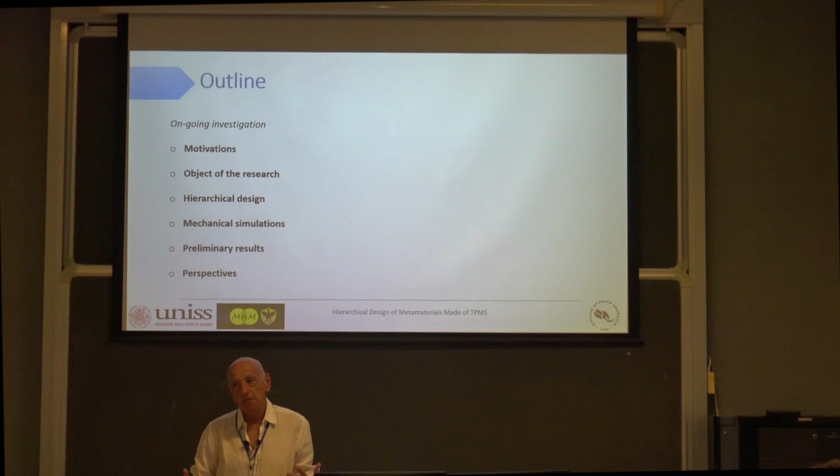Okay, so let's go to some more technical stuff. First of all, I have to say this is ongoing investigation, so I'm just presenting some ideas, some developments, and problems, mostly problems. So this is the outline.

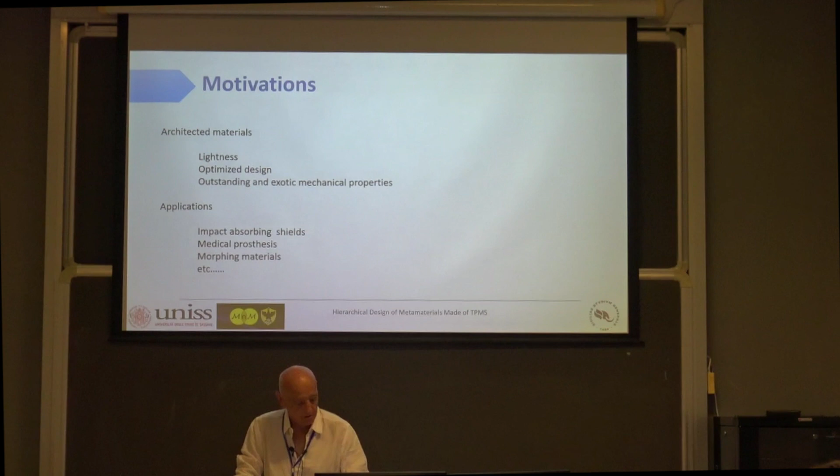We want to work with architected materials. We know why—there are many applications, as we've already seen. A huge amount of metamaterials have been proposed: foams, lattice materials. We know they have very nice properties, for instance for impacts. They have very large ductility, and so on.

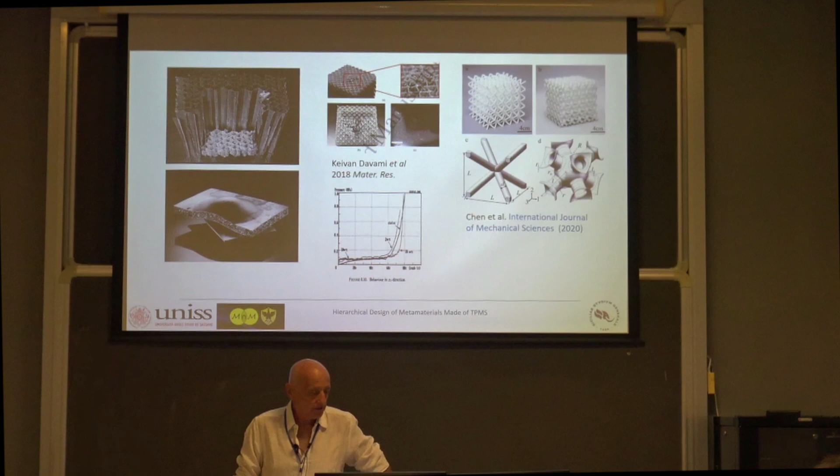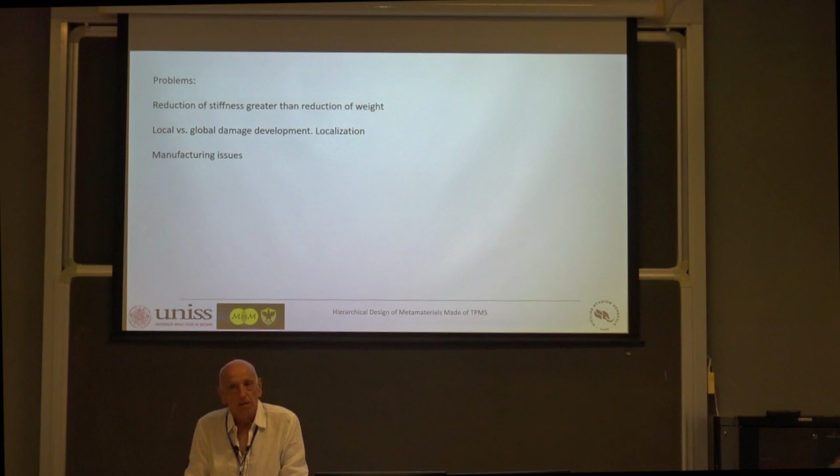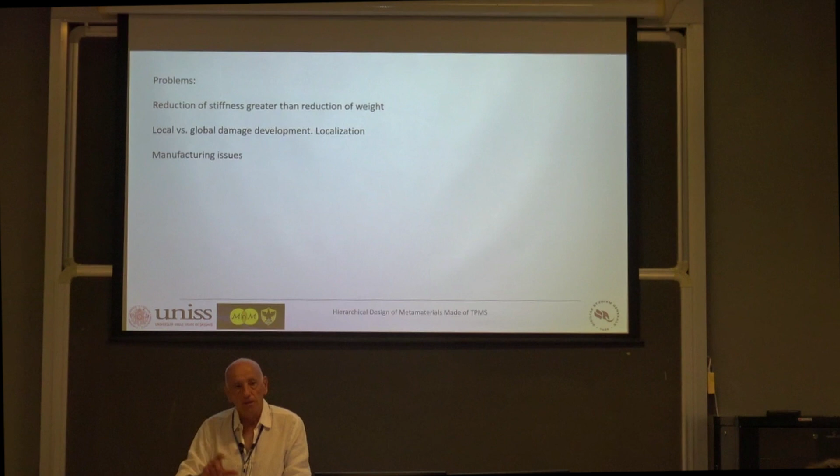So why aren't they always used? First of all, there's a general problem: the reduction of stiffness is much greater than the reduction of weight, usually. There's a limit, of course. In almost all these materials, we have localized damage development, with competition between local and global damage. Sometimes this is desirable, sometimes not, depending on the application. And there are manufacturing issues.

In order to show that, I will present a small experiment. We produced this sample made of titanium—a network, a lattice made of cubic cells. During manufacturing, spheres were placed in the joints so that we could have an improvement of properties at the nodes.

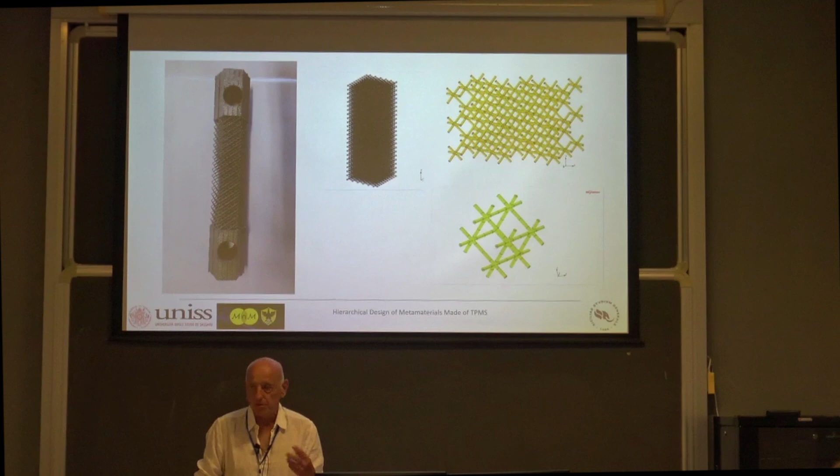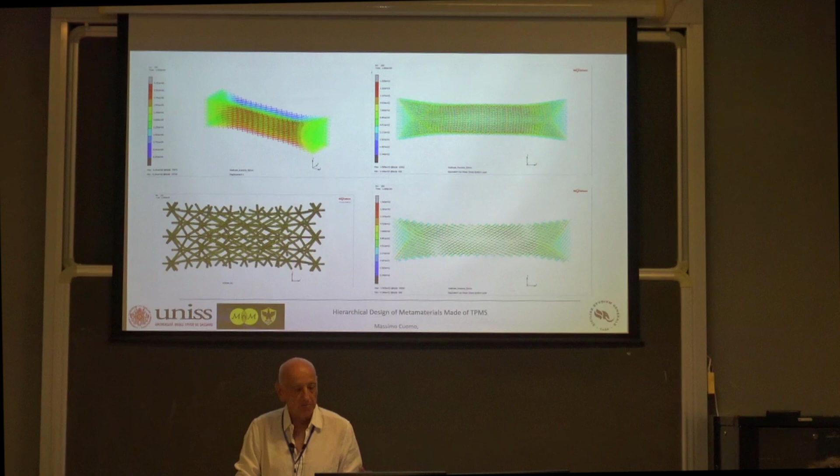And so we did some simulations—extension and compression. In the simulation, we could develop rather large deformation due to the fact that plasticity would spread almost throughout the whole specimen before rupture. In this image, the red spots are the plastic areas.

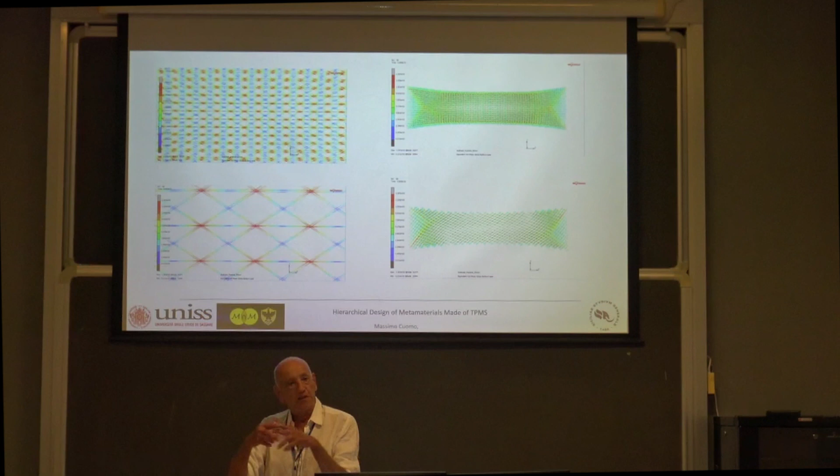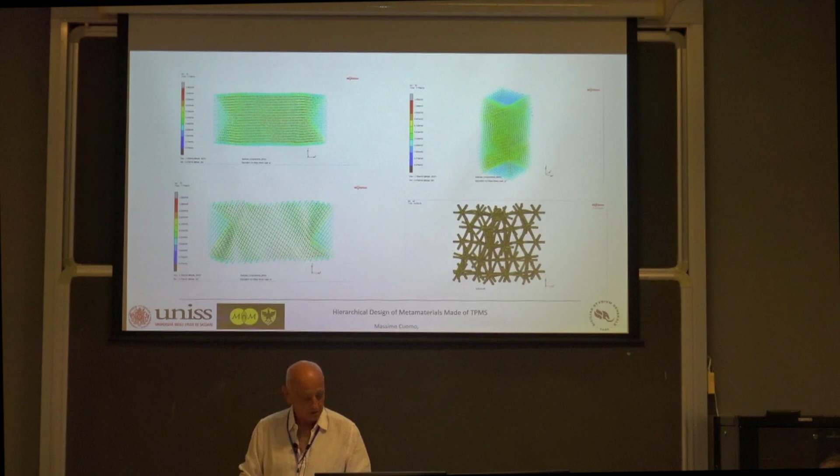This can be seen in some detail—the plasticity was spreading, of course, at the joints. Those are rigid joints. Similarly in compression, the deformation shows some bands due to the boundary condition, which was clamped. On top is...

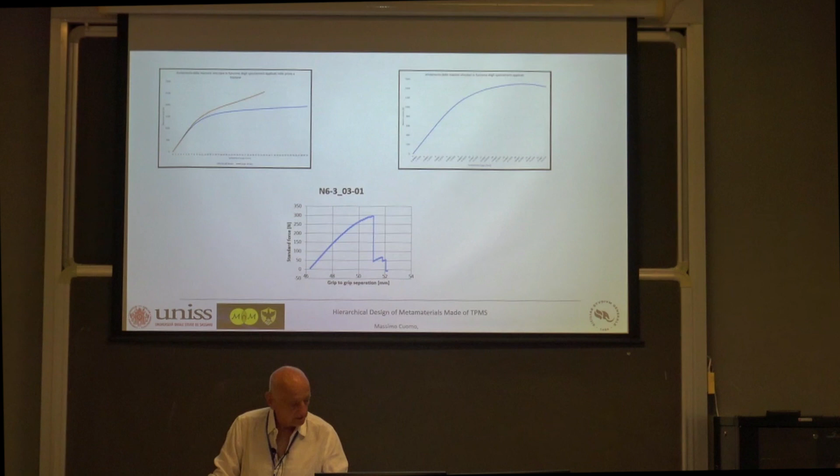...the analytical prediction we were expecting, and on the bottom was the experiment. So, completely different, and also the level we reached was much lower than what we expected. The reason is that the sample behaved in a completely brittle way. It's very interesting because at first look you can see the bands, and the 45-degree band seems like a ductile rupture, but the rupture of the single microbeam was totally brittle.

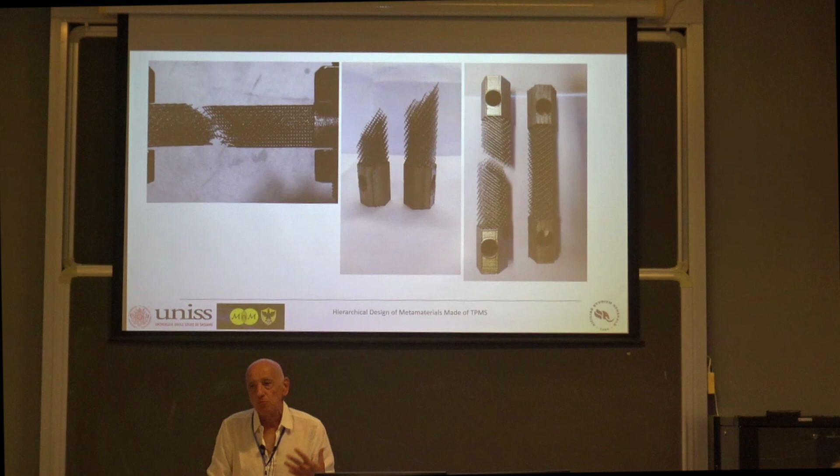The reason is that the thickness of this microbeam was small, a fraction of a millimeter if I remember correctly, so it's comparable with the grain size of the 3D printing process, and it ended up much more fragile than what we expected from the properties of titanium.

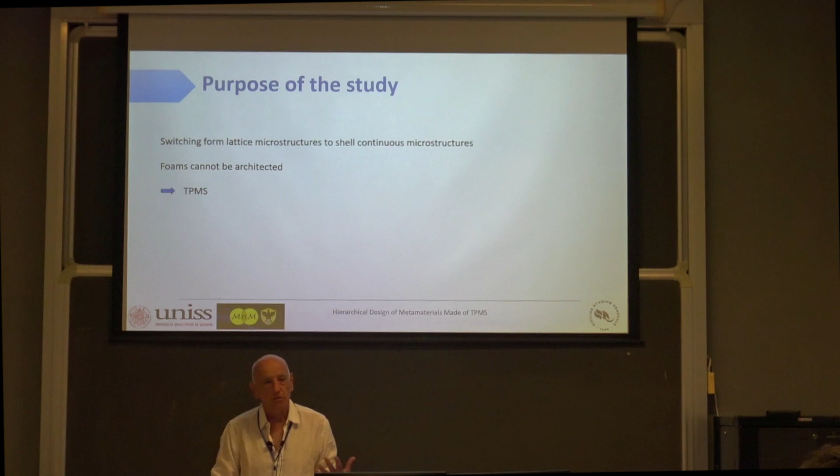So the idea is to switch from lattice microstructure to continuous microstructure made of surface shells. Foam is a possibility, but foams cannot be architected—the process is random, so it can be nice but uncontrolled. So we started trying to see what can be done with triply periodic minimal surfaces.

Everybody knows what is a minimal surface. A minimal surface is a surface that at each point has zero mean curvature, so it's an anticlastic surface. From a mechanical point of view, these have some benefit in the prevention of buckling.

Another property of the minimal surface is that locally the surface is a critical point of the area functional, and in some cases a global minimum, so it's also interesting for minimizing weight. Also, the surface is in equilibrium with an isotropic state of stress, which is very interesting from a mechanical point of view. What we expect is that using minimal surfaces, if the deformation is not very large, so we stay close to the shape, some load can be carried mainly by membrane forces rather than bending forces.

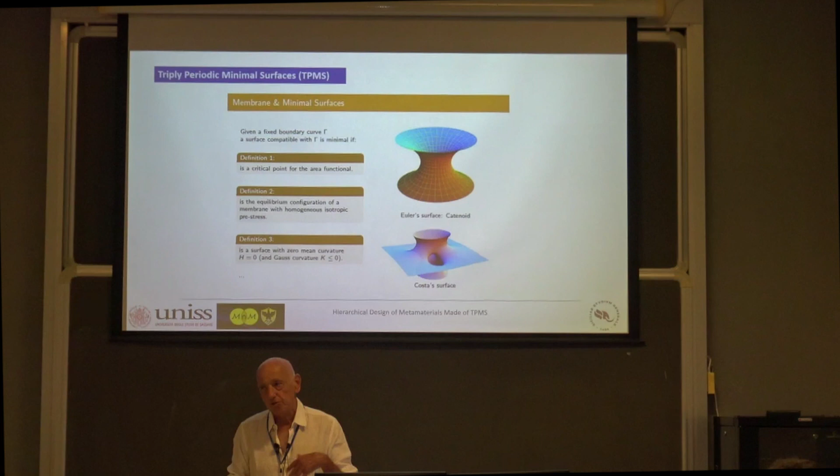So what we hope to achieve in this way is less brittle elements and versatility of design, which I will show. There are also other properties that are very interesting with this kind of structure. Triply periodic minimal surfaces divide a continuous structure into parts.

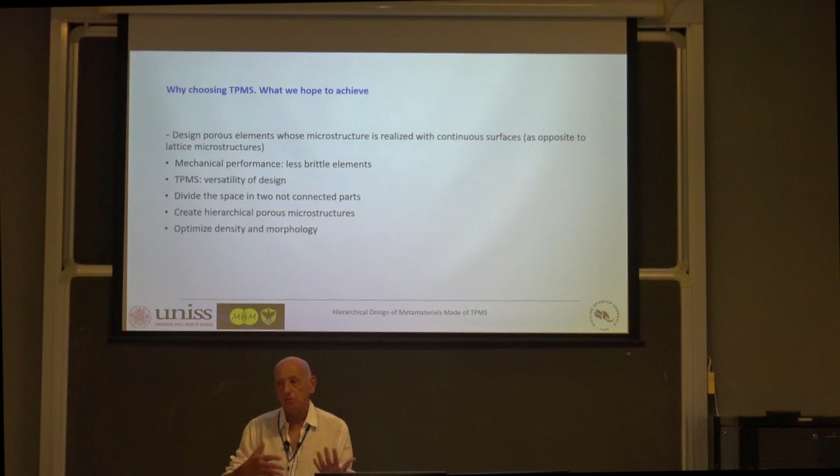They divide the space into not-interconnected parts, which is very useful when you want fluid transport. Coolers have been proposed made with this kind of design, and they can be useful in medical devices too. We can also create hierarchical porous microstructures, optimizing density and morphology.

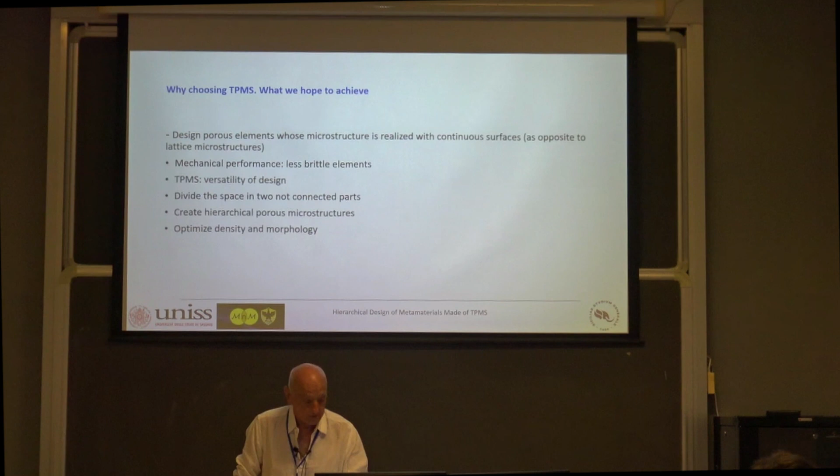Another thing, which is probably why people started investigating this, is that they are found in nature. For instance, in a certain butterfly with a strange name, the wings are made by layers of gyroid. This happens because they are photonic crystals, and they're used to give the bright colors in the wings.

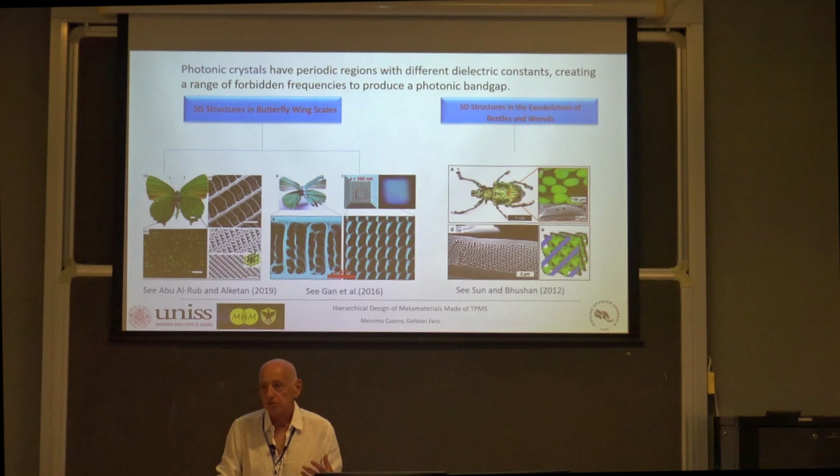Beetles also have microstructures made from diamond periodic microstructures.

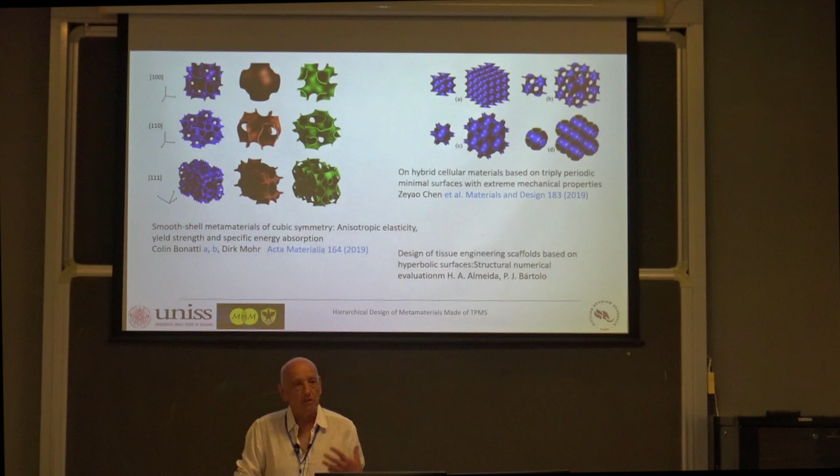This is not a new topic—there are hundreds of publications on it by now. People have tried to investigate and develop every kind of structure made with these materials. So what I'll present now is mostly well known, with maybe a little something new.

Triple periodic minimal surfaces basically refer to Schwarz minimal surfaces, a family of surfaces developed by Schwarz. The most famous are the primitive, the diamond, the gyroid, and the Neovius. I won't talk about the Neovius; I'll use the other three.

In every 3D printing apparatus, there's already built-in software for building these well-known surfaces. They use this kind of equation—a general equation with several terms and a level parameter, the t parameter. If this t parameter is 0, we get something which is, let's say, a minimal surface in quotes. If this t parameter is not 0, we get other things which are not minimal surfaces.

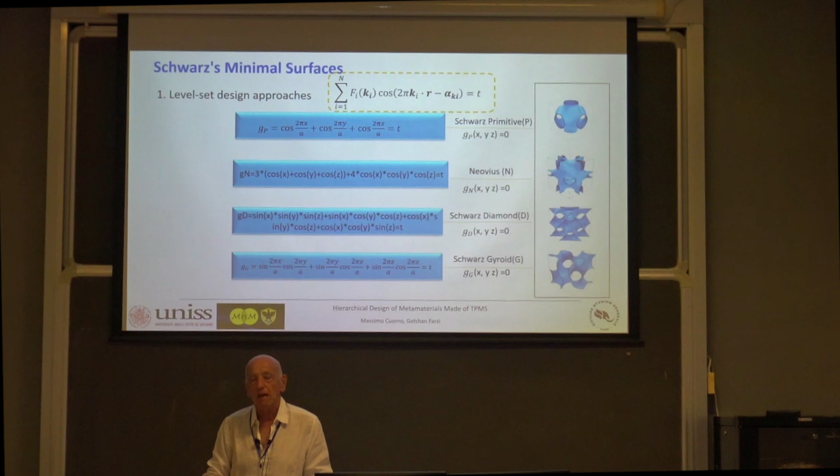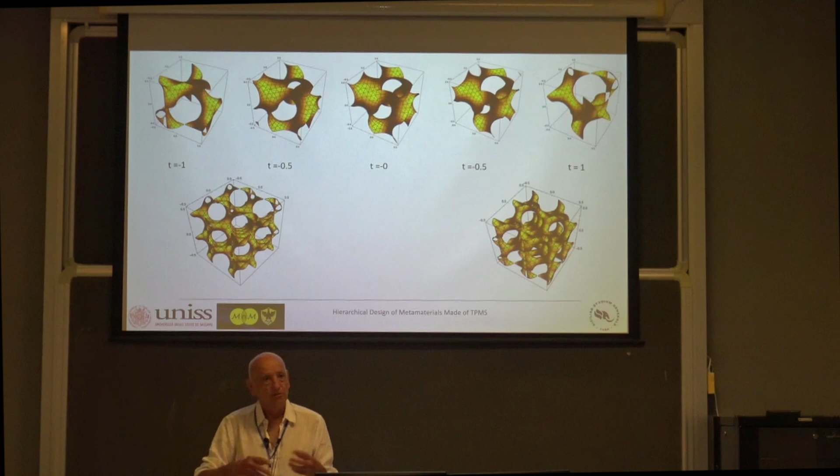So this is important. This is, for instance, for the gyroid—what happens if this t parameter goes from -1 to +1. You can see it better in the bottom line. When this parameter is very large, you get an almost lattice-like material. So by changing this parameter you can modulate from lattice to surface.

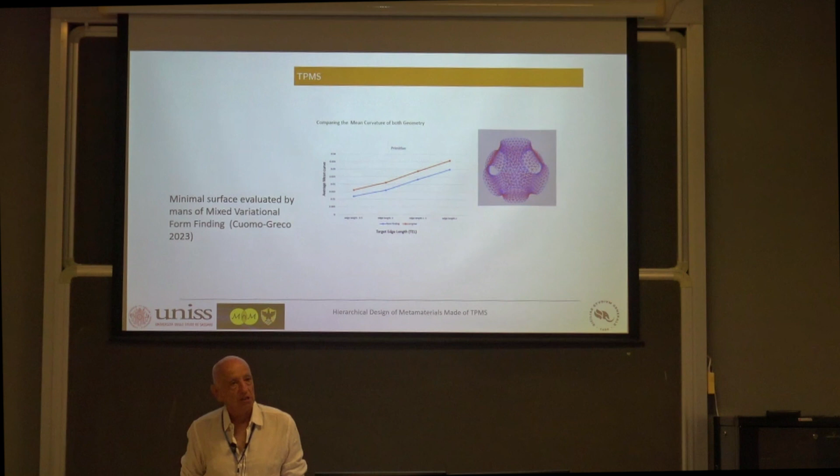Anyway, we have to be careful, because even when we set this level parameter to 0, we do not get exactly a minimal surface. This is shown by the mean curvature—in red for some mesh, since we're measuring it on a discretized mesh. The red line is what we get from the equation, and the blue line is what we get from our form-finding variational method, which is somewhat different. Not by much, but it makes some difference.

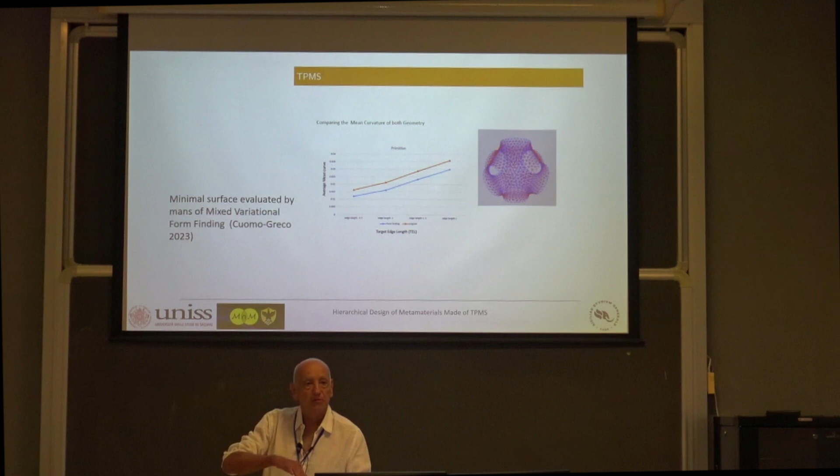So it should be possible to take the minimal surface, convert it to STL format, and use it for printing.

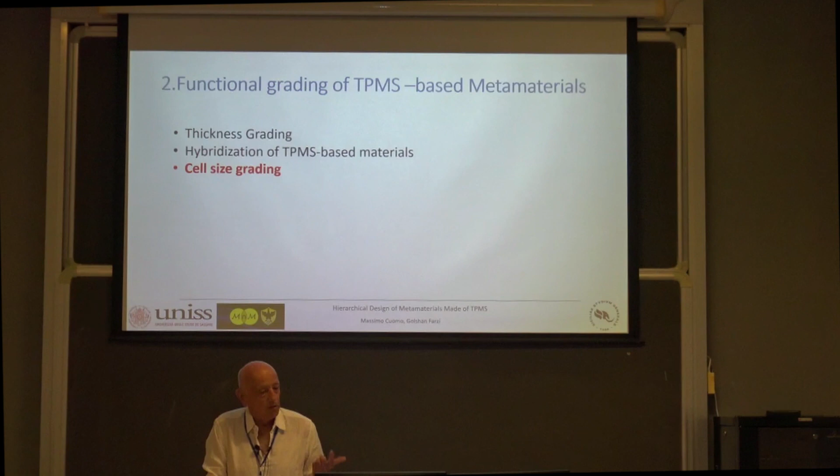Another thing we can find in nature is that usually these structures are not homogeneous—they're combined in a hierarchical way, with multiple levels of hierarchy. There are three ways we can grade these metamaterials: we can grade the thickness, we can hybridize the structure, and we can change the cell.

Surprisingly enough, at every point of the transition, mean curvature is zero. I was surprised to find this, but it's a minimal surface that continually changes from one shape to another.

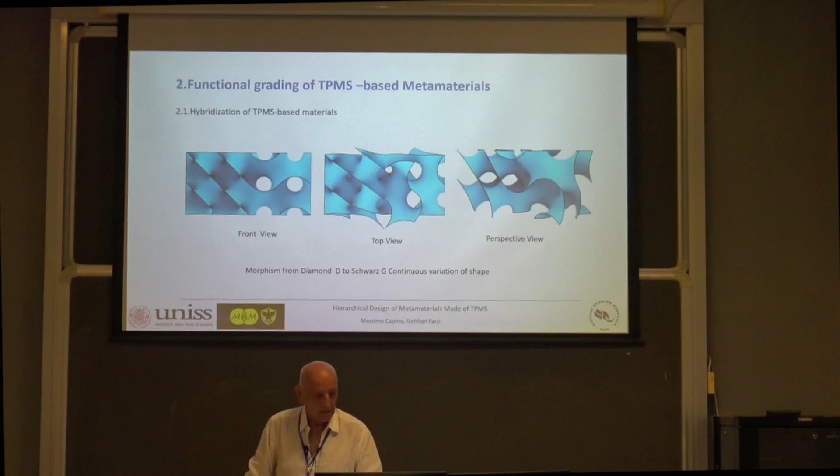This can be done with all kinds of Schwarz surfaces, which are changing thickness. Thickness is a bit more difficult - this is a continuous change of thickness, meaning within a single cell thickness is not constant. And this is just changing the dimension of the cells, starting from a square and then elongating in one or two directions.

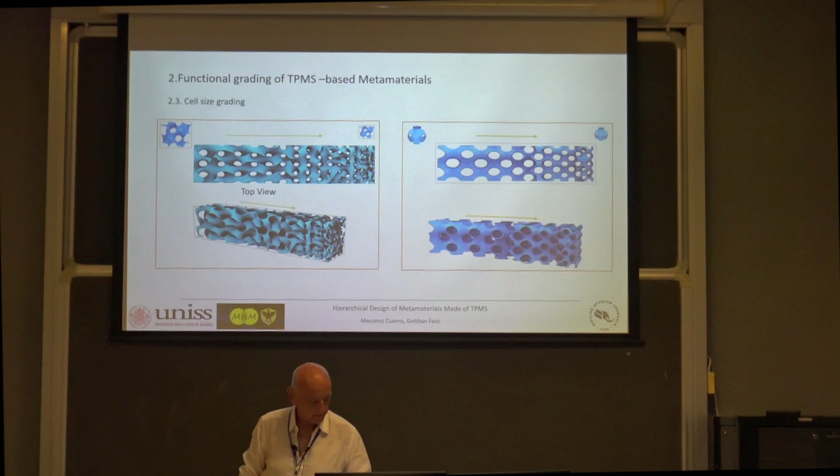So the idea is to control and modulate the hierarchical design by assigning some porosity function, defined by the user, and realize this porosity continuously, controlling the size of the cells or other properties. Everything will be described with B-spline interpolation.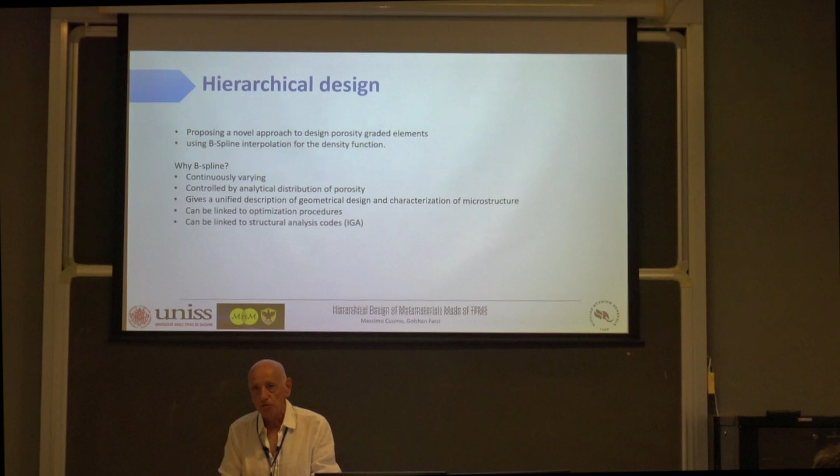Why? Because the idea is that we can use the same environment for doing CAD, optimization, and mechanical simulation. So we use isogeometric analysis, which is spline-based. With the same environment, we can try to model everything.

So the idea is we start from something, a structure - this is a square in this case - and we divide it into a certain number of cells. That's the target of our realization.

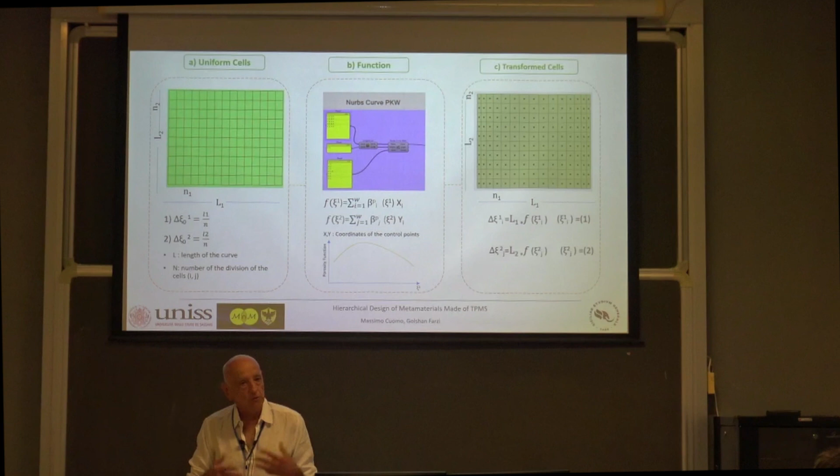We have some distribution of porosity we want to realize, or density, or something else. We interpolate it with NURBS or splines, and assign it to come out with a continuous variation of the cell dimension.

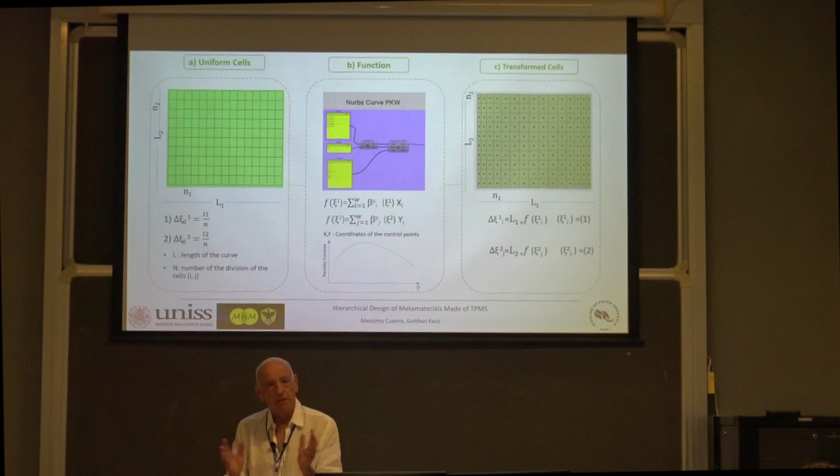And then, of course, if we increase the density of cells, we have better approximations. This is an example of a crazy distribution of porosity in two directions. That's what we get, and the colors represent it: purple is the larger porosity, and yellow is the lower porosity.

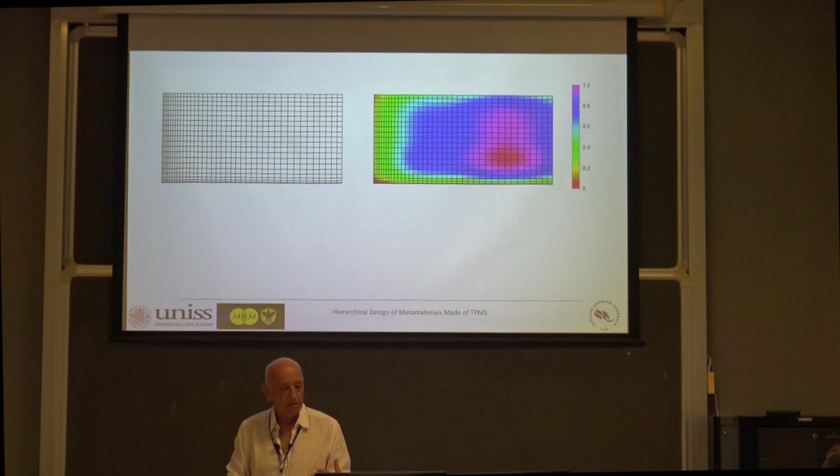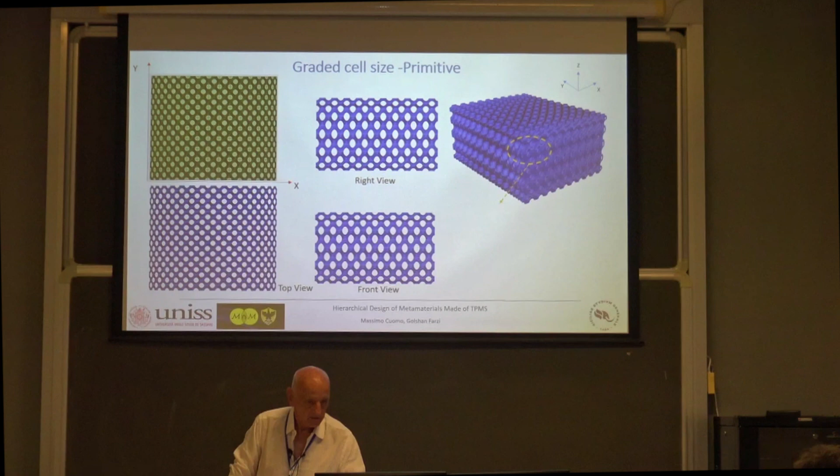It's just relative porosity. This is a 3D realization of this example. In this case, the microstructure is made with primitive cells, and in this case with gyroid microcells.

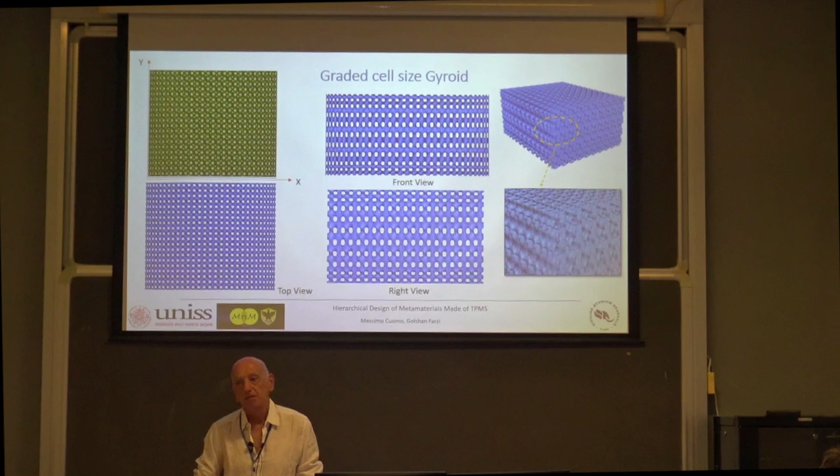Now imagine we want to make a mechanical analysis on this structure. We need some 6-7 million elements to make a reasonable interpolation of this surface, which means a very, very heavy task, especially if you want to make nonlinear mechanical analysis.

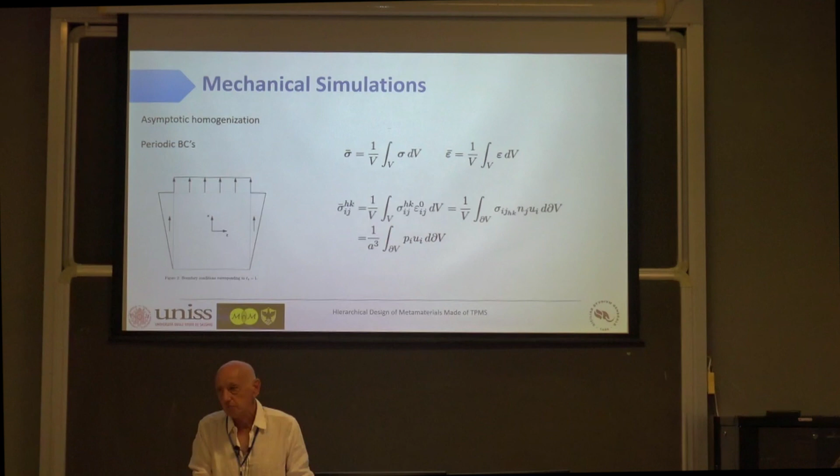So the idea is to use asymptotic homogenization, obviously with periodic boundary conditions, to obtain the homogenized properties with standard methods. It is very standard, and so what we did - I will show some results of this homogenization.

This case, this is the Young modulus. By the way, both the primitive and the gyroid surfaces, which I will talk about, behave in a cubic way, so they're anisotropic. This is the Young modulus as a function of thickness.

It is interesting to see that there is a linear variation - increasing thickness, stiffness increases linearly. That means, as we expected, the deformation behavior is membrane dominated. Otherwise, we should have found a cubic dependency on thickness. So it's very, very interesting.

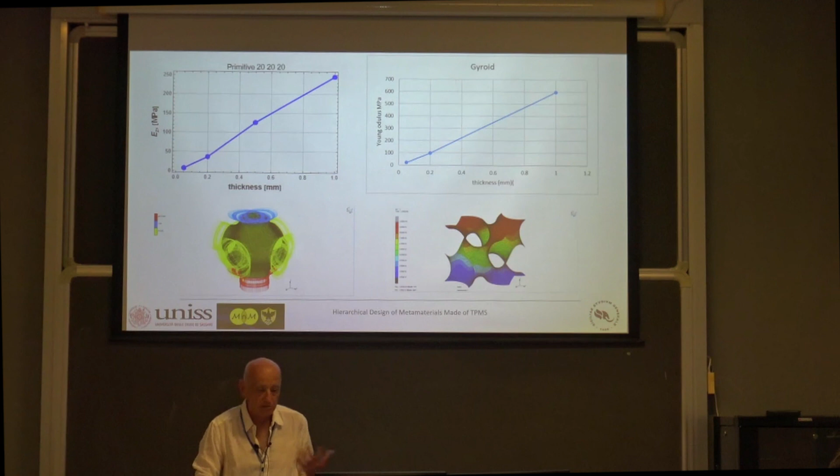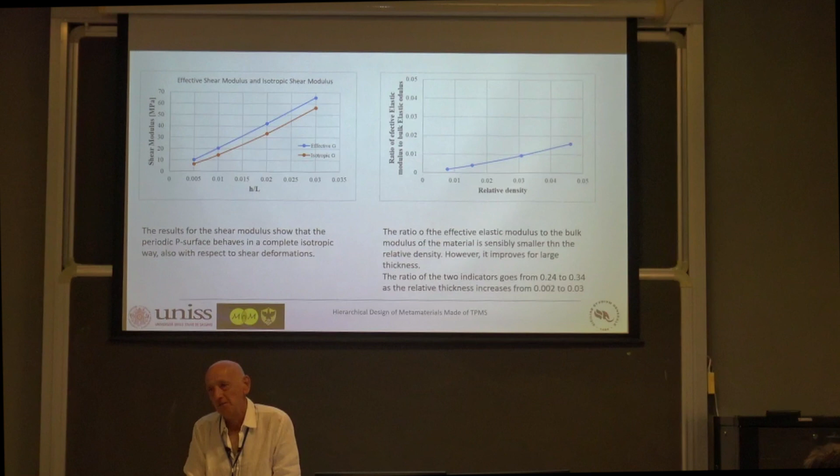Poisson ratio is not exactly constant. What's interesting is that the shear modulus almost respects complete isotropic behavior - almost, not exactly. Probably this is due to numerical approximation.

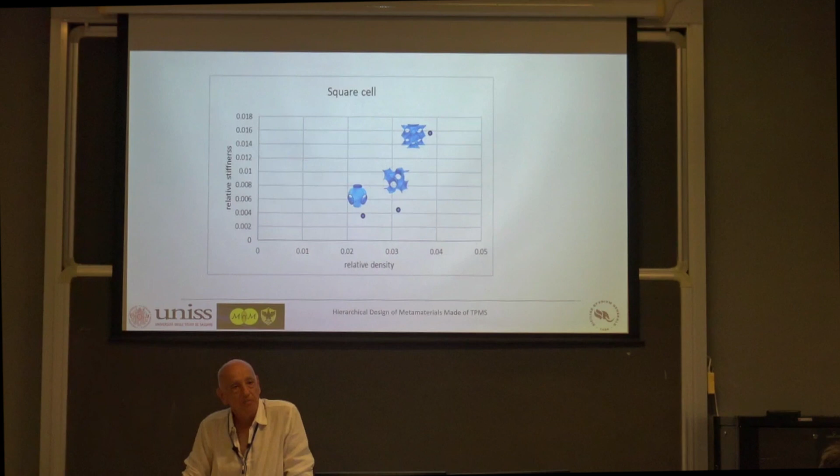This is a graph showing the Young modulus of the primitive, gyroid, and diamond structures as a function of relative density. So the diamond appears to be the stiffest microcell.

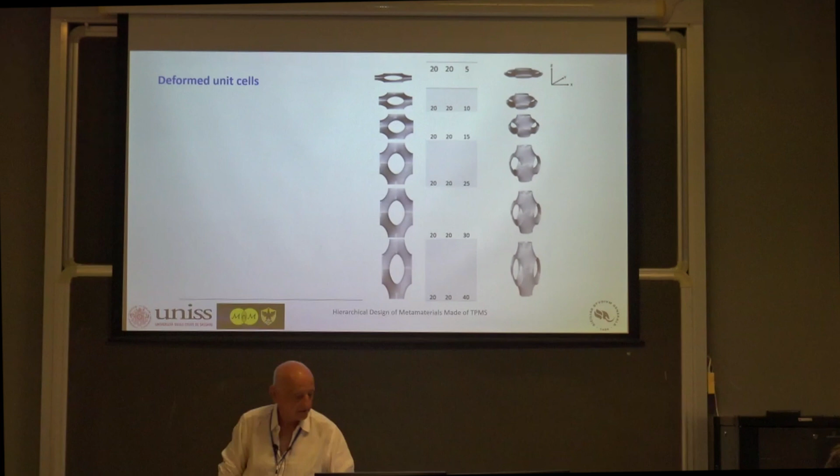Of course these are done for the same kind of thickness, but since we are grading, a single homogenization is not enough - we have to investigate all kinds of possibilities, like elongated cells. So we have to do extension in either one direction or the other, shear in one plane or the other. We have to make all this investigation, and so we come out with a bunch of results.

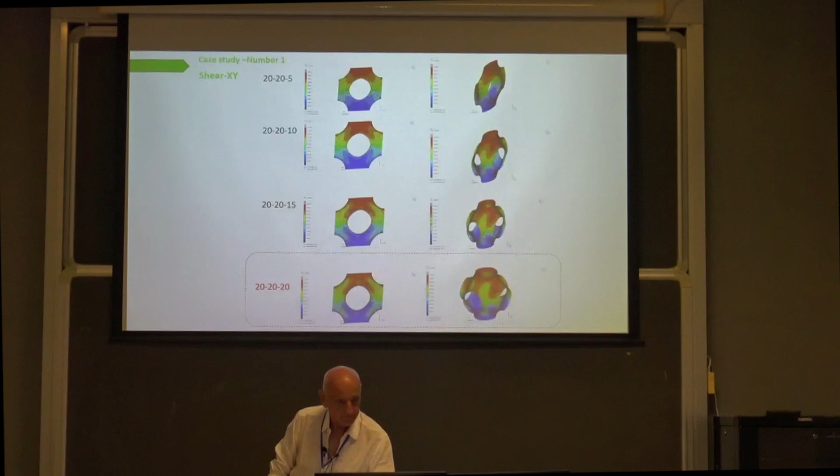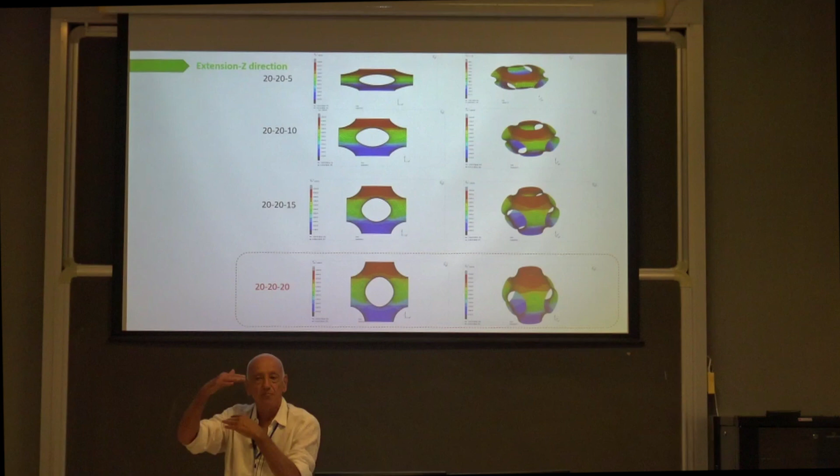If you look at the top, this is a very shallow one. In this case, elongating in one direction is dominated by bending. If you go to the one which is more elongated, it's almost a truss, so it becomes stiffer. So everything seems to be nice.

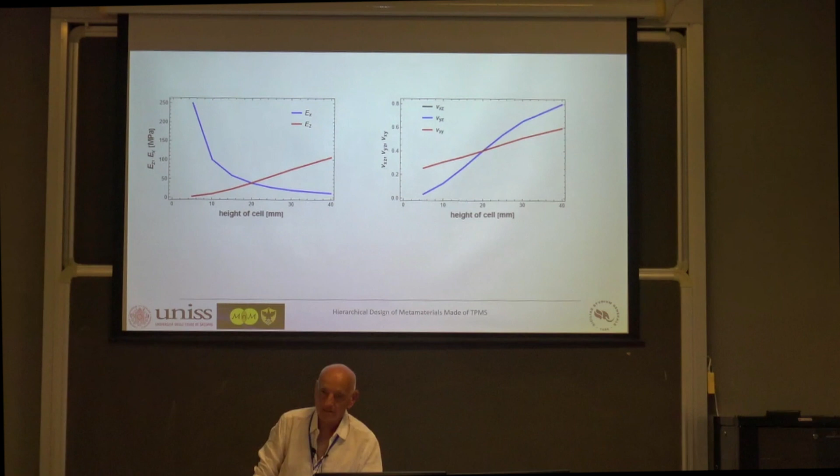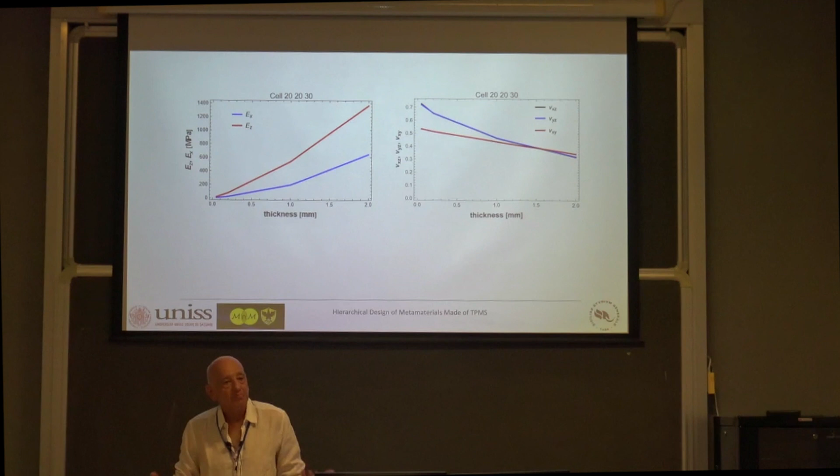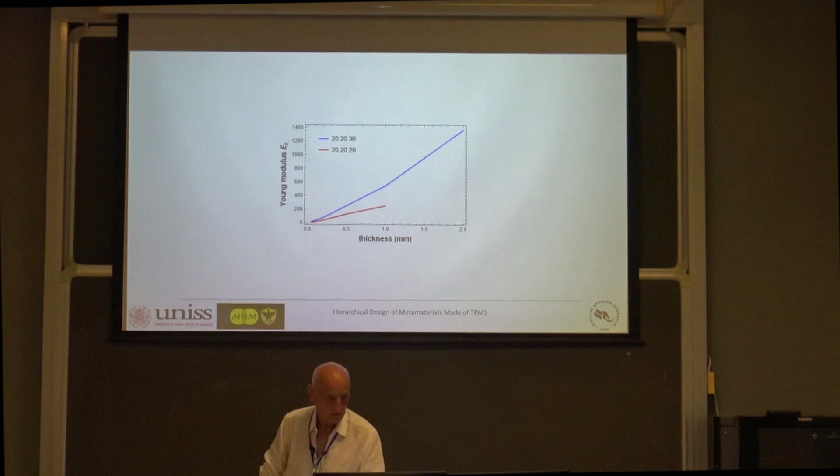And then we have to do all this kind of combination of the dimension of the cells. And this is everything linear.

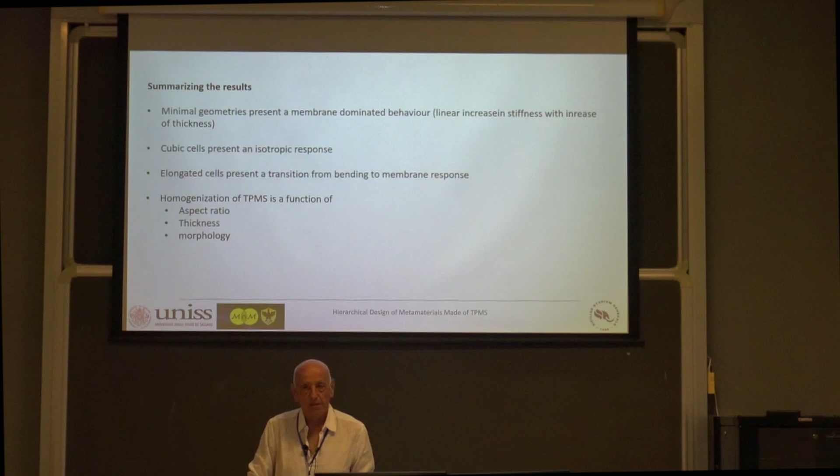So these are some results I've already said. The homogenization is a function of the aspect ratio, the thickness, the morphology. So we have very many data.

The design has been almost standardized. Somebody had already proposed in 2020 to use microstructure for this kind of analysis. The idea is that there are two parts in this implant. The top part is connected to the ball and is stiff, because that's the part going to be inserted in the bone. The lower part needs to be quite flexible because it has to adapt to the structure of the bone, and also has to be kind of porous because we want osteocytes to be introduced and reconstruct the continuity.

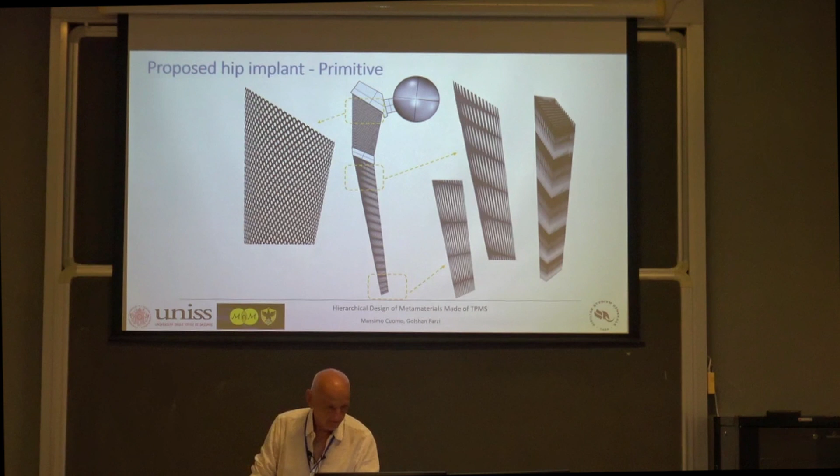You can see two enlargements of these two parts, and also in the thickness, porosity is increasing toward the center. At the center we have almost a channel where fluid can flow through. These are images.

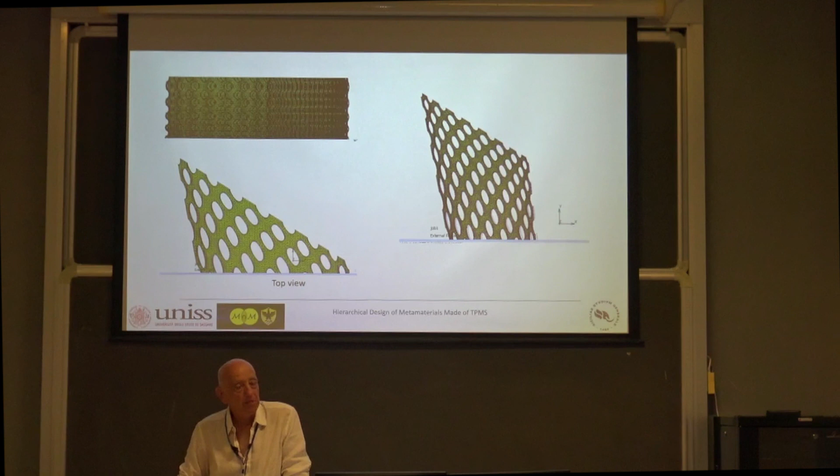So the idea is to do some detailed linear analysis in order to see if this idea could work. This is a shot of the mesh. There are 2 million, not 2 thousand, 2 million and something elements, some 10 million degrees of freedom. Anyway, it could be done.

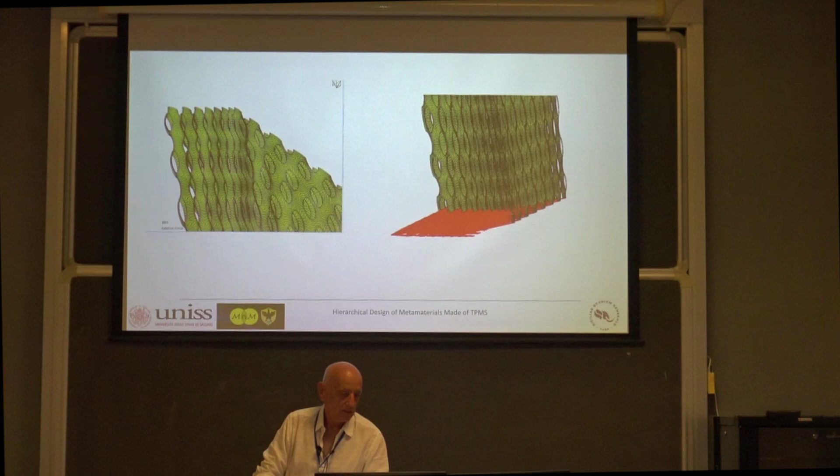I apply the shear force at the bottom. This is the deformation we get. This is something nice - we want something flexible at the bottom.

Unfortunately, there was an incident - I didn't bring with me the result of the distribution of stresses. However, it was almost impossible to understand them, so it's better to tell you what happened: at the bottom there were very small stresses, as we expected. There were larger stresses in the part which is built in, and the order of magnitude of the membrane stresses was 5-6 times the order of magnitude of the bending stresses.

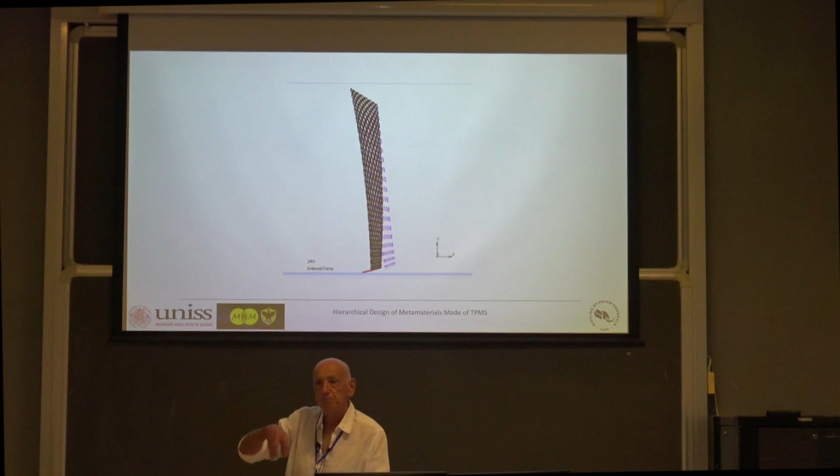Yeah, you have to believe me, but that's what we wanted to realize. Even though - so this is, we used every cell made with a primitive geometry. So this is where we have arrived.

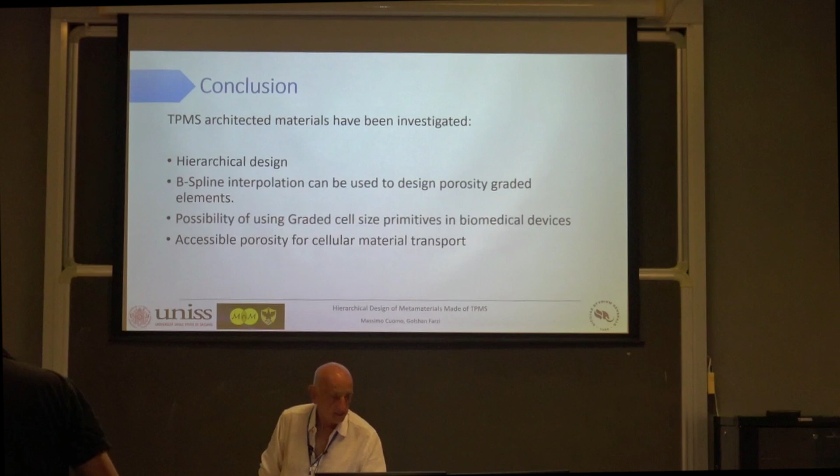This is what we have investigated, but there are future developments. We want to make other kinds of designs, but we have a lot of problems. First, we did linear homogenization. We have to make non-linear shell homogenization, which has to be numerically based. We want to investigate local versus global damage. There is a big problem of contact - when we get very large deformation, there can be contact.

In this case, any surface can contact another one. We have to apply the optimization algorithm for porosity with some objective function, of course - this is just application, nothing new. Now there's a problem with numerical analysis, because we said we have developed homogenization, even in the linear case, and we have that.

Now we want to make non-linear analysis on an equivalent continuum. But it's a non-standard equivalent continuum, because at each point we have different properties. So how can this be treated, especially in the nonlinear range, in an efficient way? Maybe data-driven analysis.

So we are a very small group, very, very small. So everybody who is interested and wants to cooperate is more than welcome.